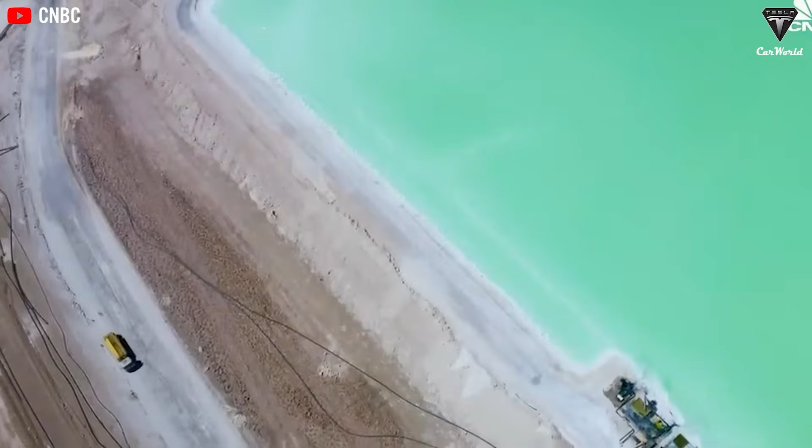Lithium-ion is everywhere around us. In phones, laptops, and more than 95% of today's EVs still rely entirely on this technology. That number alone is enough to show that lithium-ion remains the gold standard in the battery world, with few competitors capable of replacing it. But the truth is, lithium-ion batteries have been standing still for the past few years.

How long has it been since we saw a real leap in performance? Energy density is still stuck at around 250 watt-hours per kilogram. Prices haven't dropped significantly, and the risk of fire or explosion remains a constant concern. This is also why electric vehicles still haven't convinced all consumers. They remain expensive, and safety concerns continue to linger.

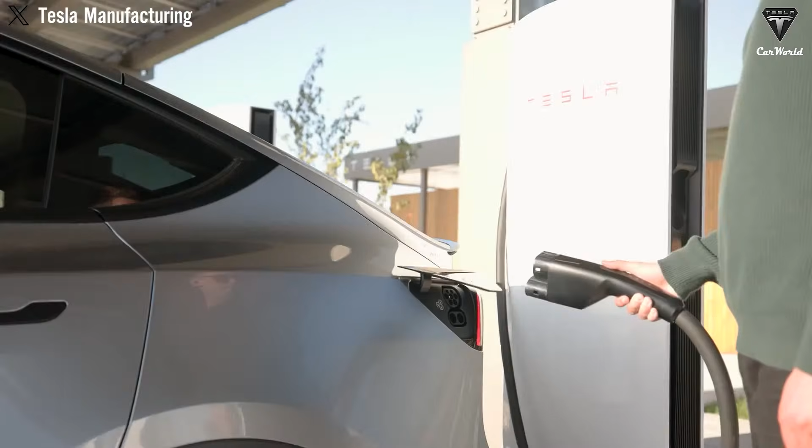Recently, EV manufacturers have begun shifting to a newer option, one considered far more efficient than lithium-ion's aging limitations: solid-state batteries. Solid-state batteries aren't just hype. Backed by rapid R&D and billions in investment from giants like BYD, Tesla, Toyota, and QuantumScape, this next-gen tech is already outperforming lithium-ion in energy density, range, and charging speed.

Mass production could start as soon as 2026. Could this be the final catalyst for EVs to leave gasoline behind for good? And what sets an EV with solid-state batteries apart?

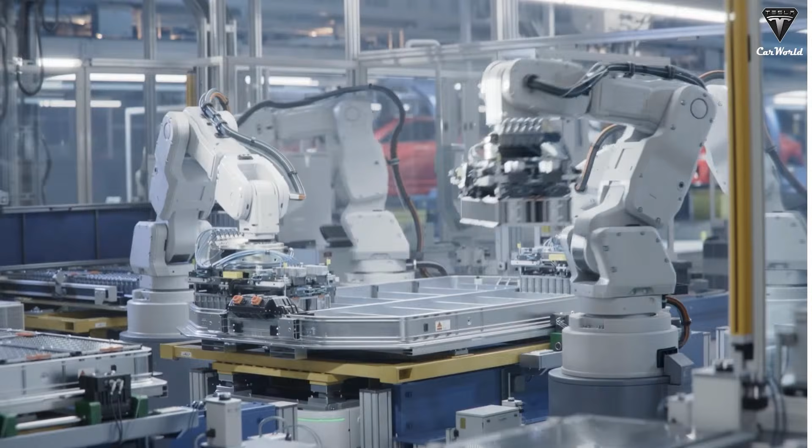So, what makes solid-state batteries worth paying attention to? We all know that most new battery technologies still haven't earned the public's full trust, and for good reason. Many are still stuck in the research or testing phase, and bold claims about breakthrough performance often come without real-world proof. But in the middle of all that noise, BYD, one of the world's leading EV and battery tech companies, and a top rival to Elon Musk's Tesla, is making some serious waves.

As you may know, BYD is already behind the Blade battery, a lithium iron phosphate battery known for its safety and durability. So reliable, in fact, that Tesla uses it in its Model Y sold in Europe. But now BYD is going even further by developing the very battery the world has been chasing: solid state.

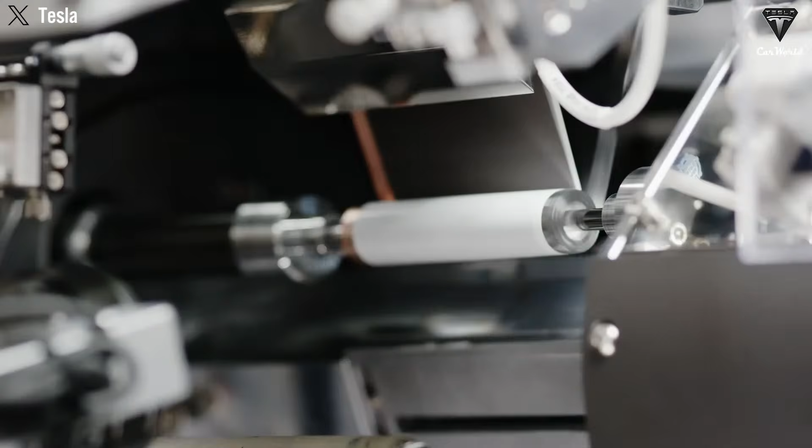They've already built a working prototype on a pilot production line and are expected to begin large-scale installation in their vehicles soon. This new battery boasts double the energy density of current cells, enabling up to 900 miles of range on a single charge. And that charge takes just over 4 minutes. If BYD sticks to its roadmap and delivers as promised, this battery could completely reshape the global EV market within this decade.

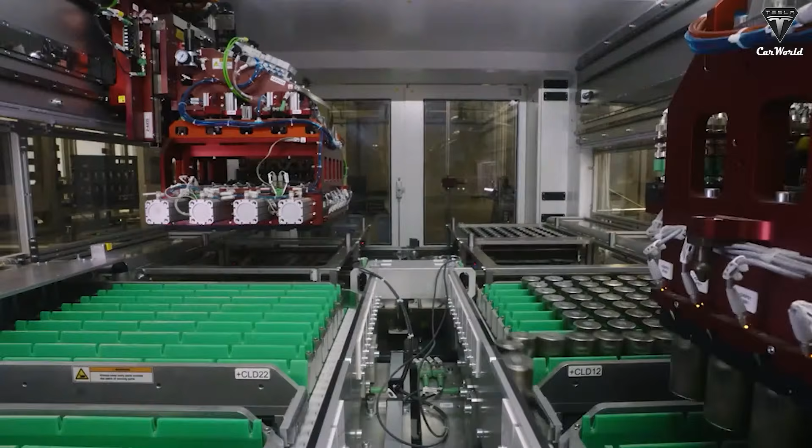Solid-state batteries mark a major leap forward in energy storage technology by completely eliminating flammable organic solvents and replacing them with solid materials like ceramics, sulfides, or polymers. This shift allows energy density to reach 400 to 500 watt-hours per kilogram, 2 to 3 times higher than that of traditional lithium-ion batteries. Imagine a suitcase the same size, but now able to hold twice as many clothes.

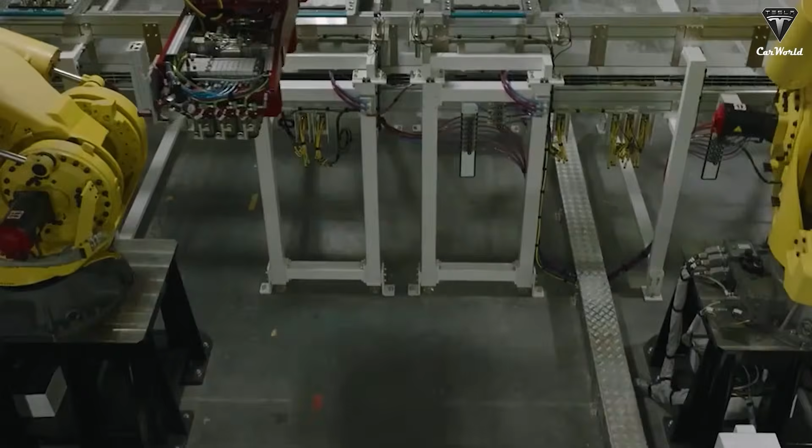Thermal resistance also sees a huge boost. Solid-state batteries remain stable across a wide temperature range, from -4 degrees Fahrenheit to 212 degrees Fahrenheit, equivalent to -20 degrees Celsius to 100 degrees Celsius, drastically reducing the risk of failure due to extreme heat or cold.

Durability? Even more impressive. With no more electrode wear or swelling issues, solid-state batteries can handle 2,000 to 3,000 charge cycles, while still retaining over 80% of their performance. That's like doubling the driving distance of a car before it ever needs a major overhaul. It might sound almost too good to be true, but these very advantages are exactly why battery giants around the world are racing towards solid-state technology.

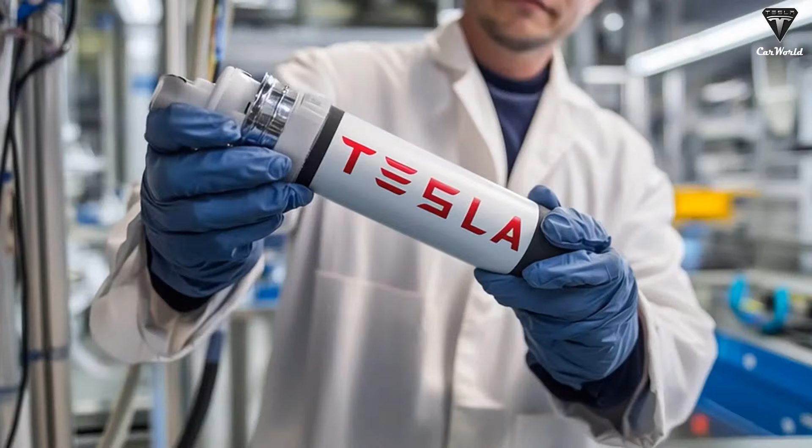In addition, many leading corporations are actively developing and commercializing solid-state battery technology. QuantumScape recently reported a breakthrough in its Cobra project, the successful fabrication of a micrometer-thin ceramic separator, a crucial step, as thinner separators lower interfacial resistance and enable higher current density. This new production method is said to be 25 times more efficient than the previous Raptor generation.

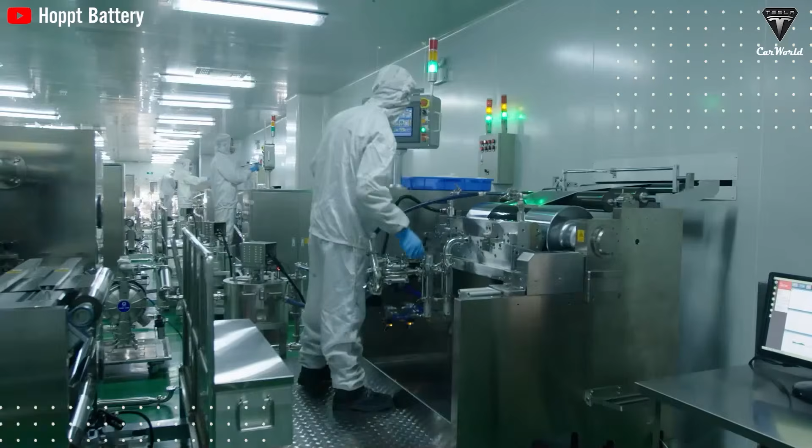The company has also partnered with Volkswagen's PowerCo, targeting a commercialization window between 2026 and 2028, in sync with the rollout of next-gen EV platforms. Solid Power, meanwhile, is focused on sulfide electrolytes, reporting room temperature ionic conductivity of approximately 1 millisiemens per centimeter. While not the theoretical maximum for sulfide systems, it's strong validation of their cell architecture, proven through 1,000 cycle tests on the BMW iX, a notable real-world milestone.

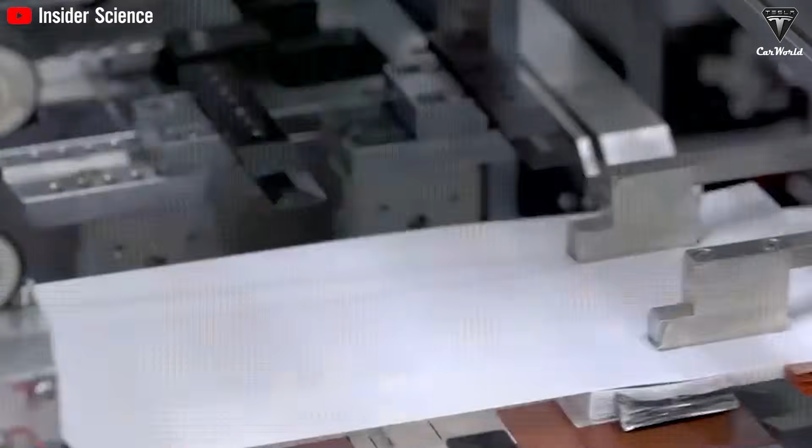On the oxide front, Toyota is developing LLZO, lithium lanthanum zirconium oxide, a solid electrolyte with a high melting point and stable performance from -4 degrees Fahrenheit to 212 degrees Fahrenheit. Their plan to integrate it into Lexus EVs by 2027 shows strong confidence in both its thermal and mechanical durability.

As for manufacturing capacity, Farasis Energy has launched a 0.2 gigawatt-hour pilot sulfide battery line in Germany, aiming to scale up to 1 gigawatt-hour per year by 2026 for both EVs and grid storage.

Finally, Huawei has unveiled a hybrid sulfide polymer battery boasting 450 watt-hour per kilogram energy density, over 2,000 kilometers of range, and an 80% charge in just 10 minutes. Impressive figures that, while promising, will need to be validated through rigorous life cycle testing and the demanding conditions of

the automotive industry. The truth is, every time a new battery type makes headlines, most people probably just roll their eyes and think, "Oh great, another gimmick." There's a common belief that these new batteries will never make it to mass production, let alone become mainstream in electric vehicles. And, honestly, we used to think the same. That reaction is completely understandable.

Lithium-ion has earned its place as the gold standard for EVs thanks to its stable energy density and a dramatic drop in cost, from around $1,000 per kilowatt-hour in 2010 to roughly $130 per kilowatt-hour by 2024. However, take a closer look, and it's not just us.

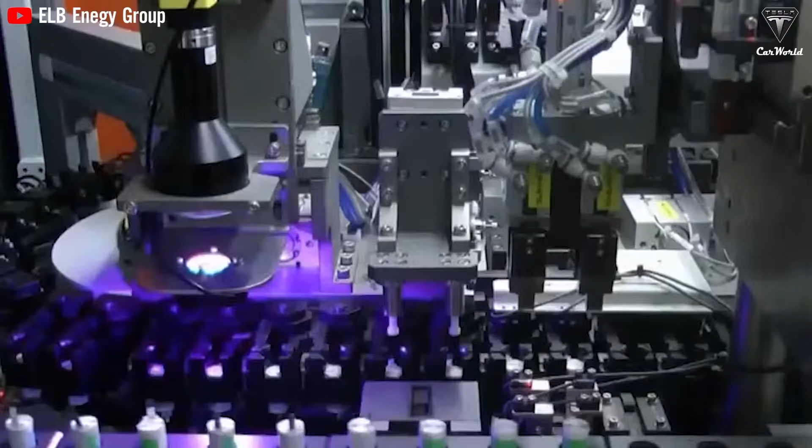Many experts agree. Lithium-ion is one of the biggest reasons EV performance has hit a ceiling. Despite being widely adopted for decades, this technology has slowed innovation and eroded public confidence in electric vehicles. By key metrics, traditional lithium-ion batteries typically offer around 180 to 250 watt-hour per kilogram. In contrast, next-gen solid-state designs are targeting 400 to 500 watt-hour per kilogram.

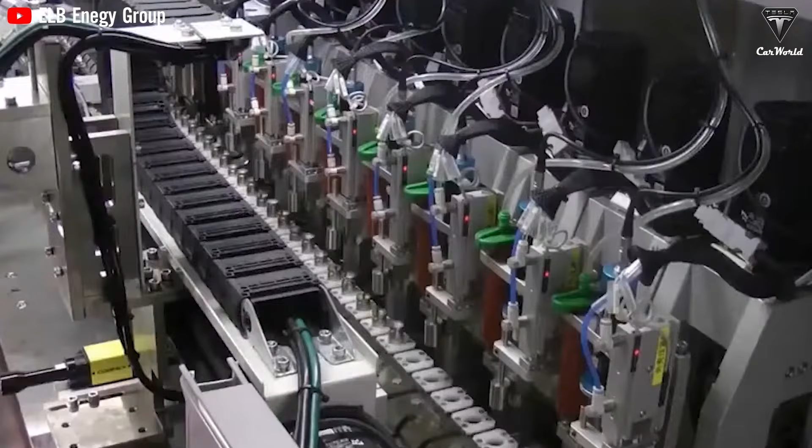That kind of jump can translate to either lighter battery packs or significantly longer driving ranges, without increasing size or weight. Lifespan also tends to favor solid-state batteries. Instead of the typical 1,000 to 1,500 full charge-discharge cycles seen in lithium-ion batteries, solid-state batteries can deliver around 2,000 to 3,000 cycles, meaning their capacity fades more slowly over time. Charging speed is another key differentiator.

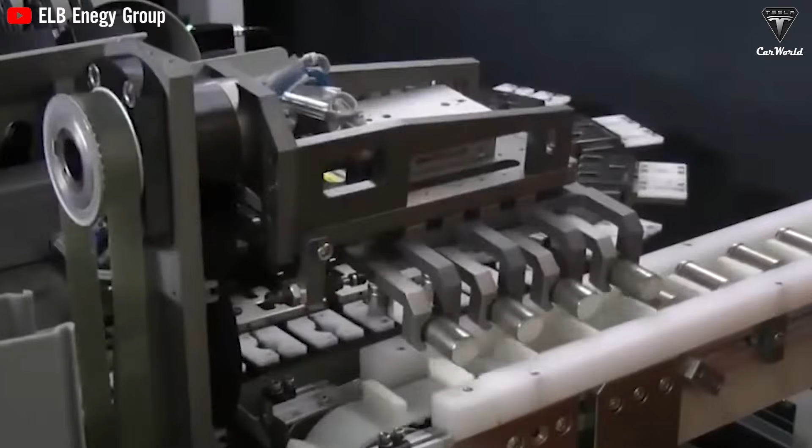Most lithium-ion battery systems go from 0 to 80% in about 25 to 35 minutes, while solid-state tech is targeting just 10 to 15 minutes, significantly cutting downtime. They also operate within a much broader temperature range, from -10 degrees Celsius to 50 degrees Celsius for lithium-ion, compared to -20 degrees Celsius to 100 degrees Celsius for solid-state, which could simplify thermal management systems.

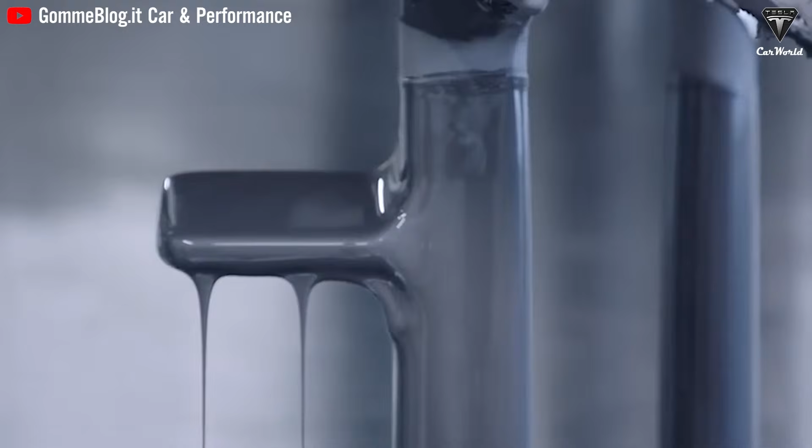Safety rounds out the list of advantages. By replacing flammable liquid electrolytes with solid materials, the risk of thermal runaway drops from moderate to high to virtually zero. That said, current lithium-ion chemistry still holds key strengths. It's proven, mass-produced, and highly cost-optimized.

Top-tier lithium-ion cells are already pushing the upper limits of their energy density range, though results vary based on cell format and pack design. Some of the most impressive solid-state metrics come from controlled prototypes, and transitioning those into mass production while maintaining fast charge durability and addressing interfacial resistance remains an active engineering challenge. For now, lithium-ion remains the practical choice for mainstream applications, especially where cost and supply chain maturity are critical.

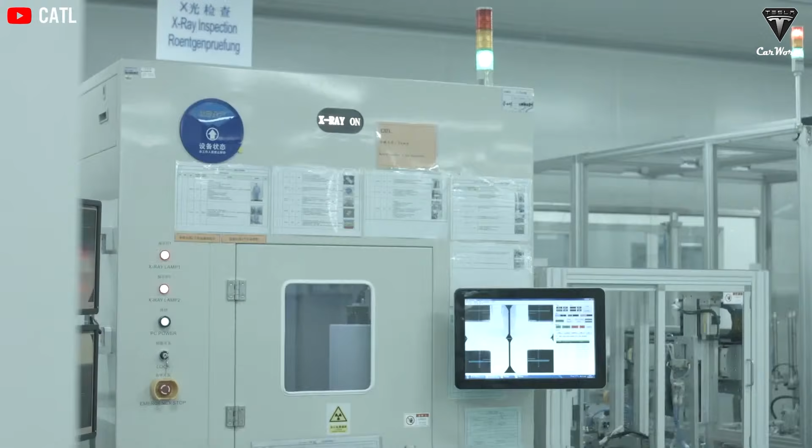Still, the direction is clear. If manufacturers can industrialize solid-state batteries without compromising these numbers, they offer a compelling foundation for the next generation of electrified systems, with higher energy, faster charging, greater thermal resilience, and improved safety. When will semi-solid batteries hit the road in EVs?

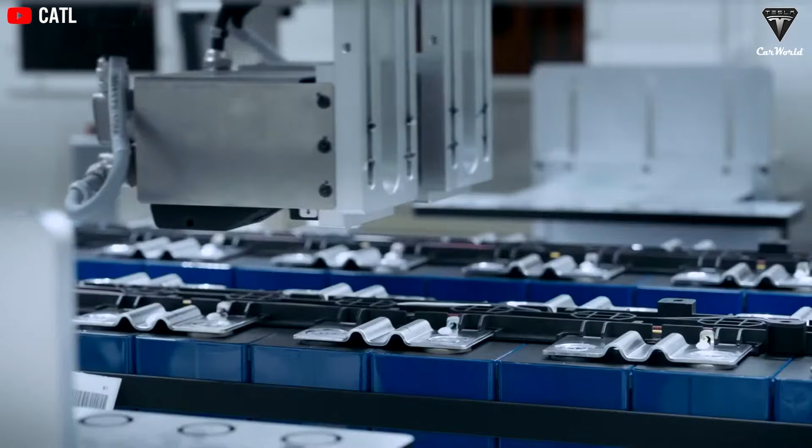Lithium-ion batteries have long struggled with key challenges, including the risk of fire or explosion due to thermal runaway when damaged or overheated. On top of that, technological progress has been relatively slow, with energy density improving by just 5 to 10% per decade. Environmental concerns are also mounting, especially around the mining of raw materials like nickel and cobalt.

Solid-state batteries offer major advantages: up to 2 to 3 times the energy density of today's LFP cells, along with impressive durability and superior safety. They're almost non-flammable. This is exactly why the EV industry often refers to them as the holy grail of electric vehicle batteries. Put simply, every battery cell is made up of 4 key components: a cathode, anode, electrolyte, and separator.

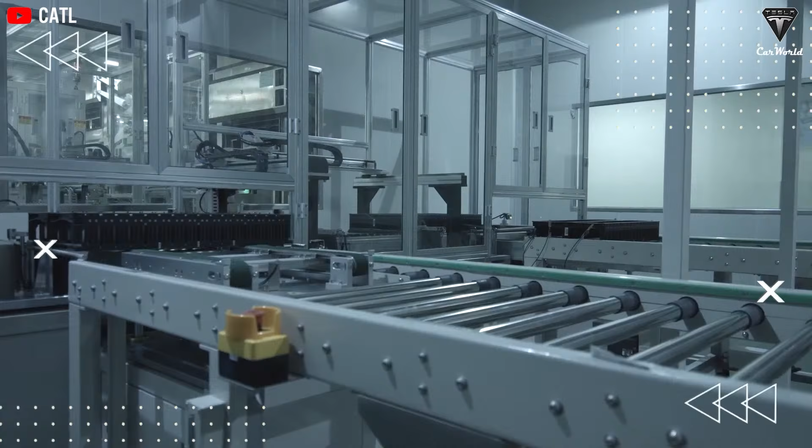As the name suggests, solid-state batteries replace these components, most importantly the electrolyte, with solid materials. What truly sets them apart is the solid electrolyte layer positioned between the anode and cathode, whereas traditional lithium-ion batteries use a liquid electrolyte in that same space. This is where solid-state batteries shine. They can store more energy, deliver higher power output, and are significantly safer than their lithium-ion counterparts.

Liquid electrolytes in conventional batteries are flammable, prone to leakage if the cell is cracked, and can trigger thermal runaway, a dangerous chain reaction that spreads from one cell to another. In contrast, most solid-state batteries today use ceramics or polymers as solid electrolytes.

The application roadmap for solid-state batteries kicks off around 2025 and 2026, focusing on validating the technology under real-world conditions. Prototype cells are already being tested in trial vehicles by BMW, Volkswagen, and Toyota, while pilot production lines are up and running in the US (Solid Power), Germany (Farasis), and China (Huawei).

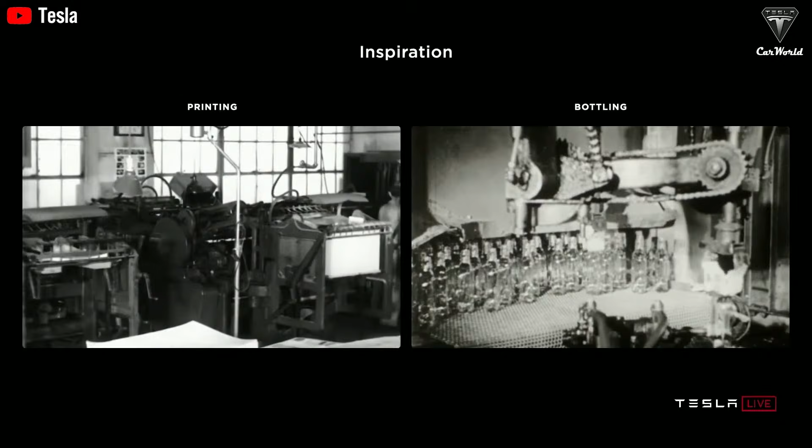The current priority is stabilizing manufacturing processes, controlling key variables like separator thickness and moisture levels, especially for sulfide-based systems, standardizing cell formats, and conducting safety evaluations at the module and pack levels, all essential steps toward meeting regulatory certification standards.

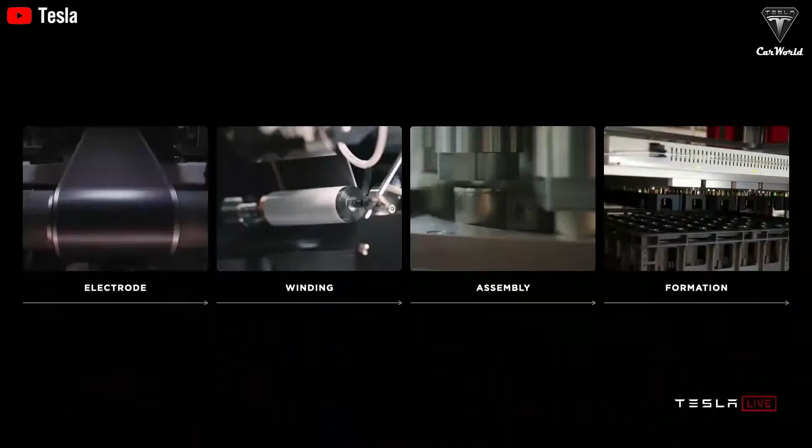From 2026 to 2028, solid-state batteries are expected to enter a limited-scale semi-commercial phase, with a focus on premium segments and industrial storage, markets that can absorb higher costs in exchange for better energy density and safety. As cumulative production approaches 1 gigawatt-hour, prices are expected to begin stabilizing. Manufacturers will concentrate on increasing production yield, reducing defects, optimizing thermal propagation control, and fine-tuning battery management systems for lithium metal anodes using real-world performance data.

Between 2028 and 2030, the goal is to scale up to mainstream vehicle segments, particularly compact sedans and crossovers, comparable to the Tesla Model 3 category, as solid-state battery costs approach parity with lithium-ion battery cells. At this stage, they must meet demanding requirements: long-cycle life warranties, minimal degradation under repeated fast charging, and full compatibility with 800-volt vehicle architectures.

After 2030, the technology is expected to see widespread adoption across entire EV lineups and grid storage systems. This phase will go hand-in-hand with supply chain standardization, multi-source material strategies, the development of recycling protocols, and end-to-end cost optimization, all critical to ensuring large-scale reliability and sustainability.

Back to BYD. The company has confirmed that its solid-state batteries deliver an energy density of 400 watt-hours per kilogram, nearly double that of conventional lithium-ion cells, which average around 210 watt-hours per kilogram, and significantly higher than BYD's current Blade battery, which offers about 160 to 165 watt-hours per kilogram.

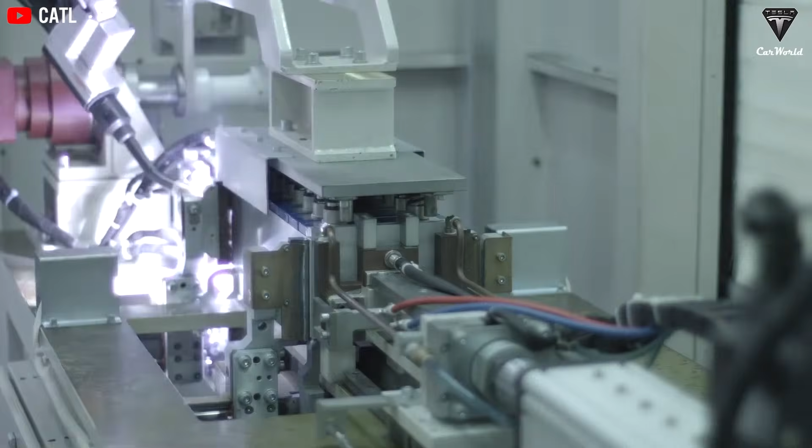Imagine this. If you bought a current BYD Seal equipped with an 80 kilowatt-hour Blade battery, you'd get around 373 miles of range. Now, with the new solid-state battery of the same size, that range could jump to an astonishing 870 miles. But here's the thing. You might not even need that much capacity. A smaller 60 kilowatt-hour pack could still deliver up to 621 miles of range. That's insane. The higher energy density of solid-state batteries means you can store more power without adding weight, a critical advantage for electric vehicles.

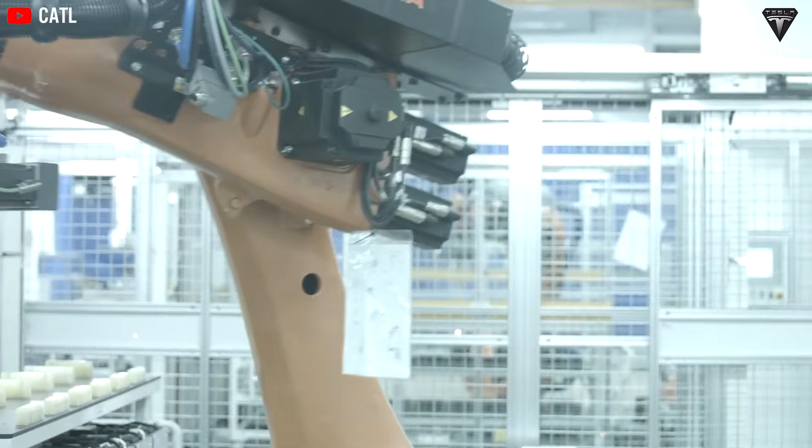Of course, 400 watt-hours per kilogram isn't record-breaking compared to some other solid-state contenders. Companies like CATL, Amprius Technologies, and QuantumScape have already developed batteries exceeding 500 watt-hours per kilogram. But BYD is taking a more measured approach with its first-generation solid-state cells. Rather than chasing extreme specs too soon, they're aiming for a more attainable target, one that enables faster mass production and real-world rollout. From there, they can scale and improve.

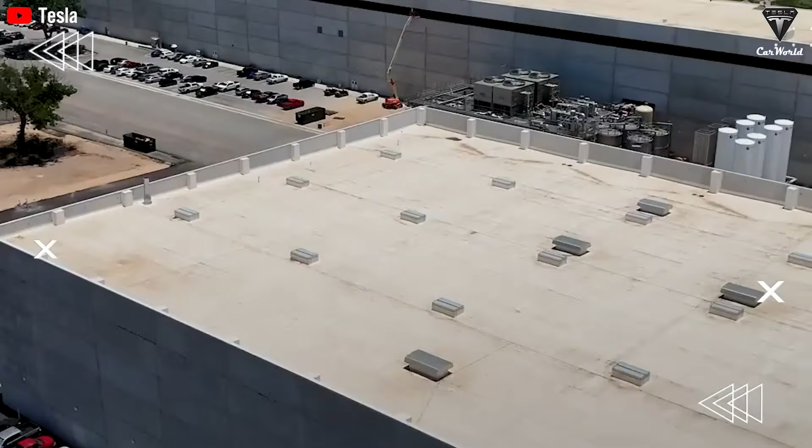Why aren't solid-state batteries used in EVs right now? One of the most critical barriers is the scalable production of ultra-thin ceramic separators. These separators, placed between the battery's anode and cathode, are crucial for the flow of ions. Unlike the flexible polymer separators used in lithium-ion batteries, ceramic separators are rigid and fragile, making them prone to cracking during large-scale manufacturing. Producing them at commercial volumes with micron-level precision and mechanical durability has proven difficult.

Many pilot production lines still suffer from high defect rates and unstable yields. Without a breakthrough in processing techniques and quality control, this component alone threatens to slow the rollout of solid-state cells.

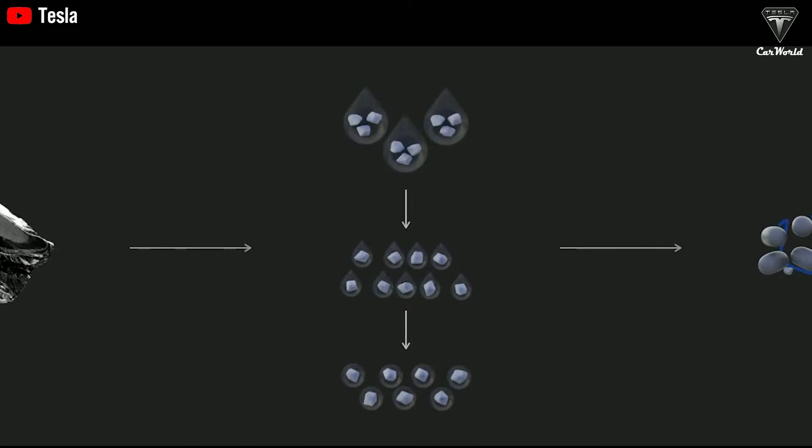Another major obstacle is performance at low temperatures. Certain sulfide-based electrolytes, widely considered among the most promising candidates for solid-state designs, tend to lose significant ionic conductivity below 0 degrees Celsius. This degradation severely limits their functionality in colder climates, such as Europe, Canada, and the northern United States. For solid-state batteries to succeed globally, they must perform reliably in winter conditions. Achieving this will require new formulations or hybrid solutions that maintain conductivity without compromising stability or cost. Without progress here, many high-value markets will remain out of reach.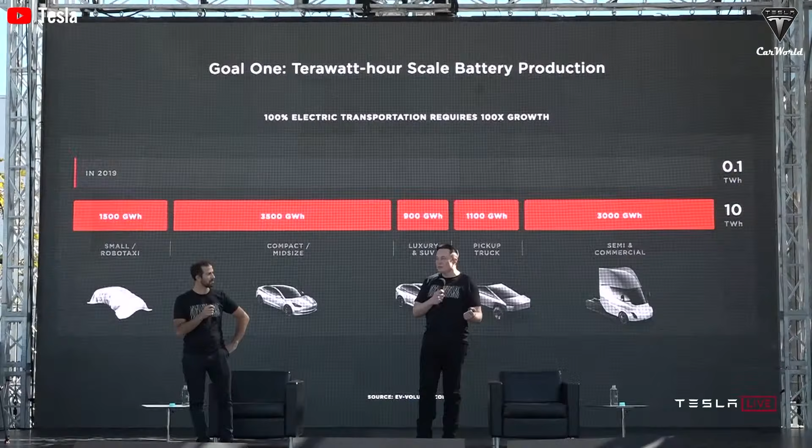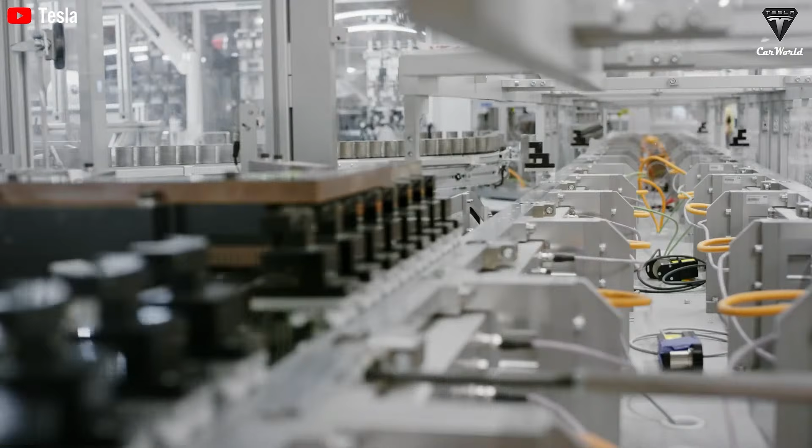So how does this new supercapacitor work? Unlike conventional lithium-ion batteries, which rely on chemical reactions to store and release energy, supercapacitors, or ultracapacitors, operate on purely electrostatic principles. Essentially, a supercapacitor consists of two conductive plates, typically made of high surface area carbon materials, separated by an electrolyte. When a voltage is applied, ions in the electrolyte immediately accumulate on the surfaces of the electrodes.

Positive ions on the negatively charged plate and negative ions on the positively charged plate. The energy is stored in the electric field formed between these two charged layers, allowing both charging and discharging to occur in mere seconds or less. Since no chemical transformations take place, supercapacitors exhibit exceptional cycle life, often well beyond 100,000 cycles, and can deliver extremely high power densities, able to supply large currents almost instantaneously.

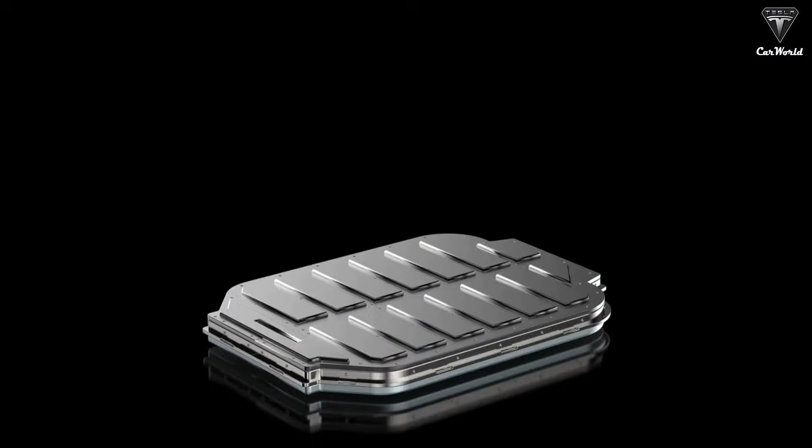However, a persistent drawback has been their relatively low energy density. Traditional carbon-based double-layer supercapacitors typically achieve energy densities on the order of 5 to 10 watt-hours per kilogram, compared to 150 to 250 watt-hours per kilogram for modern lithium-ion batteries.

This means that although supercapacitors can charge and discharge extremely quickly, often reaching full charge in seconds and delivering power densities exceeding 10,000 watts per kilogram, they cannot sustain a high power output over extended periods, making them impractical for most EV driving ranges or smartphone runtimes without substantial improvements in stored energy.

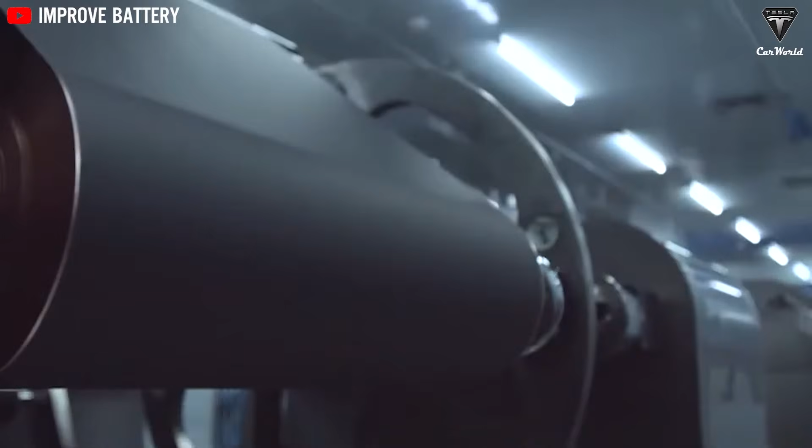Recent breakthroughs from the Korea Institute of Science and Technology, KIST, have dramatically narrowed this gap. In May 2025, a KIST research team unveiled a novel next-generation supercapacitor that leverages a composite fiber architecture combining polyaniline, PANI, with carbon nanotubes, CNTs.

In this design, CNTs provide exceedingly high electrical conductivity and a large three-dimensional network for ion transport, while PANI, an intrinsically conducting polymer, offers pseudo-capacitive behavior that supplements the electric double-layer mechanism. Together, these materials produce a composite fiber that synergistically enhances capacitance, energy density, and power output without sacrificing durability.

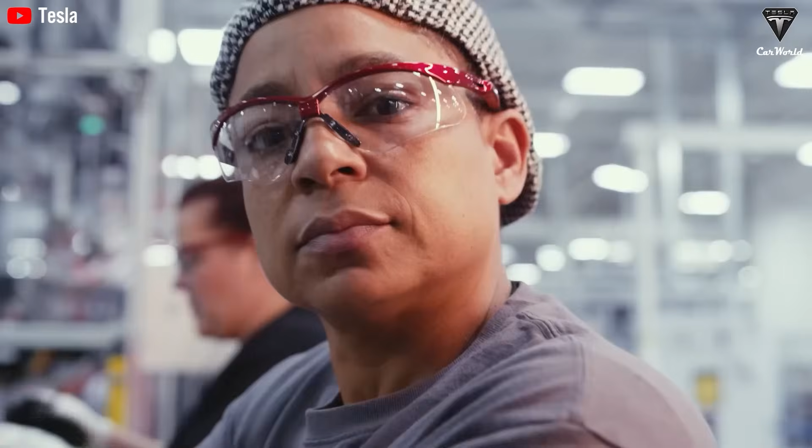Laboratory measurements demonstrate that this composite achieves a specific capacitance of 1,714 farads per gram, a staggering improvement over typical activated carbon supercapacitors, which usually deliver 100 to 200 farads per gram. More impressively, the energy density reaches 418 watt-hours per kilogram, nearly double that of many lithium-ion batteries and an order of magnitude greater than legacy carbon-based ultracapacitors.

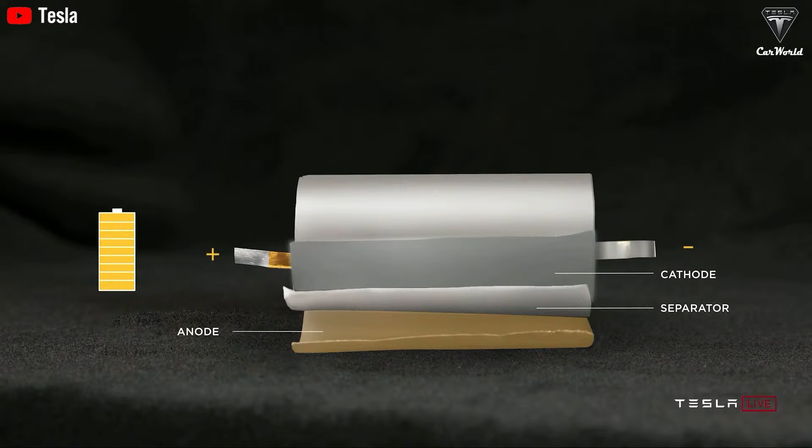Equally noteworthy, the power density is measured at 1,150 watts per kilogram, enabling ultra-rapid charge-discharge cycles on the order of seconds. After 100,000 charge-discharge cycles, the device retains nearly 100% of its original capacity, confirming remarkable stability. You might be wondering, what do these performance numbers really mean compared to today's lithium-ion batteries?

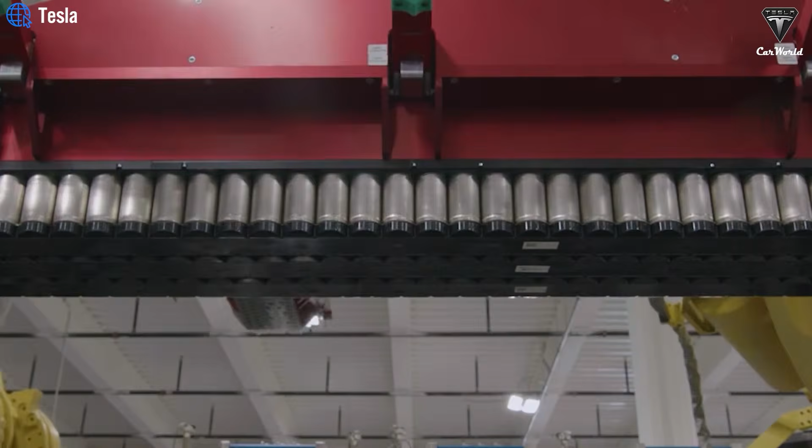Energy density. This new supercapacitor developed by KIST delivers an energy density of 418 watt-hours per kilogram. That's not just impressive. It actually surpasses the theoretical maximum for most commercial lithium-ion batteries. For comparison, even cutting-edge lithium cells like Tesla's 4680 top out around 250 watt-hours per kilogram. In simple terms, this means the KIST supercapacitor can store about 60% more energy per kilogram than today's best lithium batteries, a major leap in energy storage efficiency.

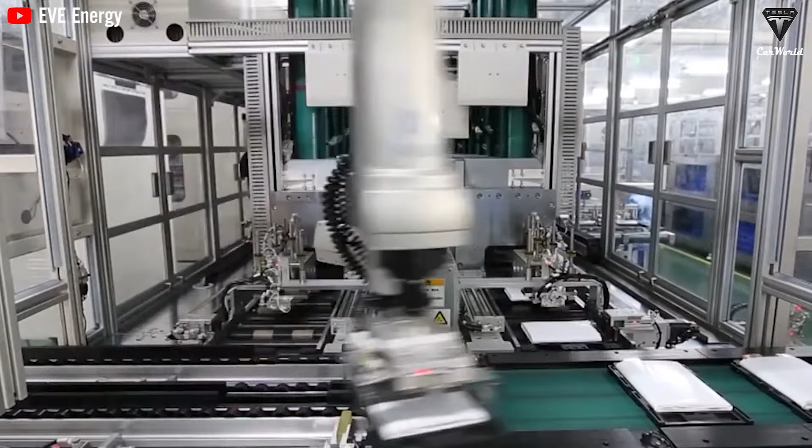Now, let's talk about durability. This supercapacitor retains 100% of its capacity after 100,000 charge-discharge cycles. That's exceptional. By comparison, lithium-ion batteries typically lose 20 to 30% of their capacity after just 1,000 to 2,000 cycles. In practical terms, this means you could charge and discharge it every single day for decades without noticeable degradation. A huge advantage for applications that require frequent, fast charging, like urban EVs, drones, or industrial equipment.

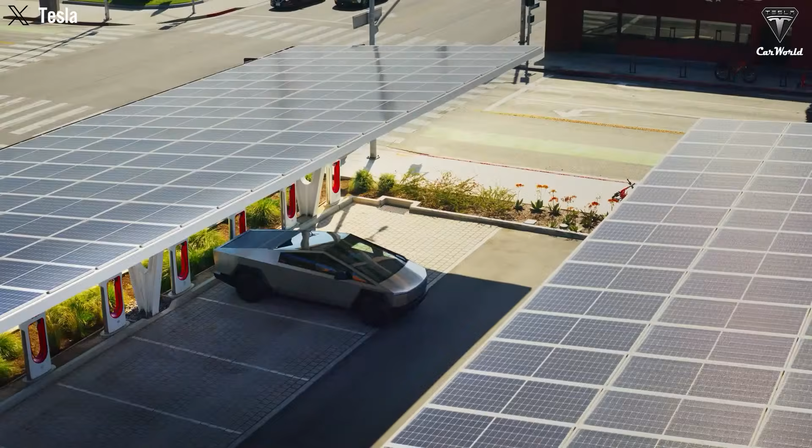Comparatively, most commercial ultracapacitors, e.g. Maxwell Technologies BoostCap modules, deliver roughly 10 watt-hours per kilogram and 10 kilowatts per kilogram, with cycle lives around 500,000 cycles.

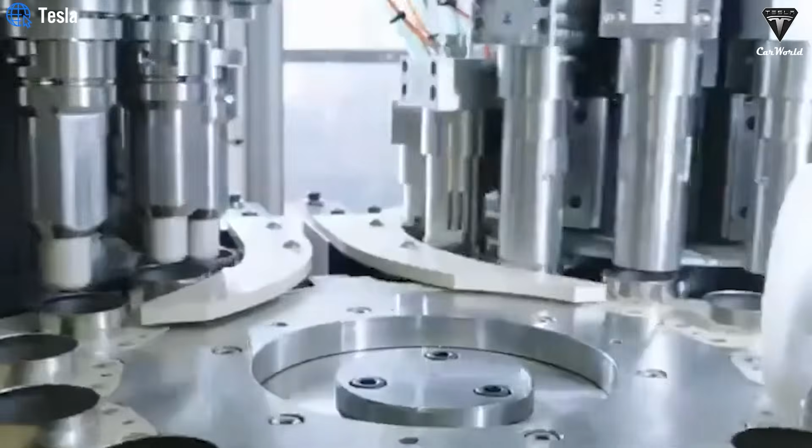The KIST prototypes leap to 418 watt-hours per kilogram and approximately 100 kilowatts per kilogram power. Normalized, this shrinks the performance gap with batteries to the point where hybrid battery-supercapacitor systems become viable even for long-range EVs. For instance, an EV equipped with a 20 kilowatt-hour supercapacitor pack could, in principle, recharge in under 3 minutes at a charging power of 400 kilowatts, matching or exceeding the fastest battery-based fast chargers.

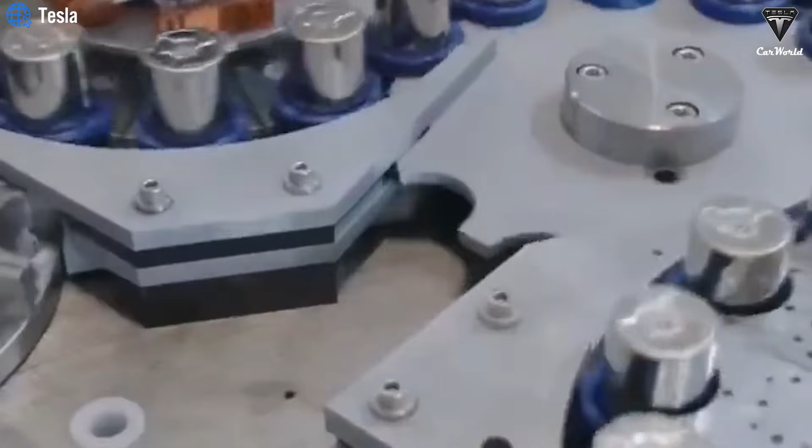What is the actual cost of this supercapacitor? Although no commercial pricing has yet been announced for KIST's breakthrough PANI-CNT supercapacitor, we can infer its likely cost structure by examining existing data on conventional supercapacitors and lithium-ion batteries, as well as preliminary estimates provided by the researchers. Traditional activated carbon supercapacitors typically cost more than $1,000 per kilowatt-hour, in large part because their low energy density, 5 to 10 watt-hours per kilogram, means that vast volumes of material are required for even modest energy storage.

By contrast, the average cost for lithium-ion battery cells fell to approximately $115 per kilowatt-hour in late 2024, and is forecast to dip below $100 per kilowatt-hour during 2025 as economies of scale expand and production processes improve. For context, lithium iron phosphate cells averaged $60 per kilowatt-hour in 2024, while high-nickel NCM cells hovered closer to $70 to $90 per kilowatt-hour. Given those baselines, KIST's PANI-CNT composite, boasting an energy density of 418 watt-hours per kilogram, nearly double that of top-end lithium-ion cells, presents an entirely new value proposition.

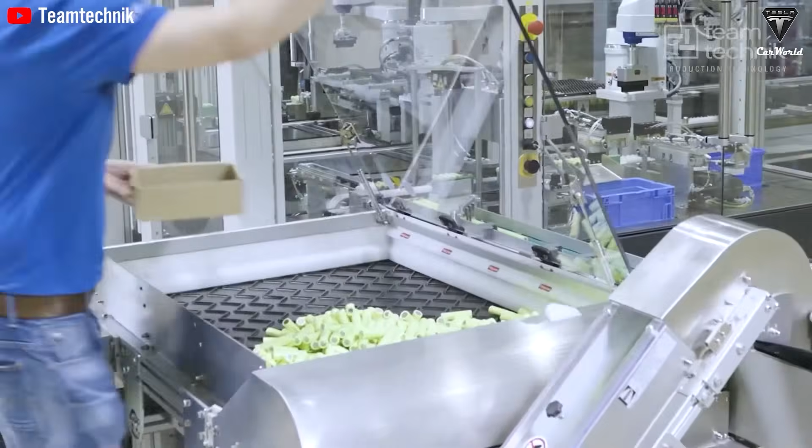In a recent press release, KIST researchers projected that once scaled, the composite fibers might be produced at roughly $50 per kilowatt-hour, on a par with or even below leading lithium-ion pack prices. This estimate is derived from the relatively low intrinsic cost of PANI, a mass-produced conductive polymer, combined with advances in CNT synthesis that leverage chemical vapor deposition at high throughput. Although single-walled carbon nanotubes historically commanded prices of $100 to $200 per kilogram, recent process refinements and increased production capacity in China have driven raw CNT costs below $50 per kilogram for bulk industrial quantities.

By contrast, premium battery-grade cathode materials like NMC can cost $20 to $30 per kilogram, but must be combined with copper, aluminum, separators, and complex electrode formulations, pushing battery pack costs to $100 to $150 per kilowatt-hour even after decades of scale. However, it remains crucial to differentiate between cell-level cost estimates, for example, raw materials plus manufacturing, and pack-level or module costs that include packaging, thermal management, control electronics, and certification. KIST's $50 per kilowatt-hour projection likely refers to the cell or fiber level, an apples-to-apples comparison with the $30 to $60 per kilogram PANI and $50 per kilogram CNT raw materials.

To achieve this, KIST's researchers employ a roll-to-roll fiber spinning process where CNTs and PANI are covalently bonded in a continuous fashion, minimizing steps and solvent usage. Such a streamlined technique contrasts sharply with the complex slurry casting methods for lithium-ion electrodes: multiple coating, drying, calendering, and lamination stages that collectively inflate costs. Consequently, even if its composite fibers cost $60 to $80 per kilogram at pilot scale, their extraordinary specific capacitance, 1,714 farads per gram, means that relatively fewer grams of material yield the same energy, translating into a cell-level cost of $100 to $150 per kilowatt-hour in early production, and potentially slashing to $50 to $80 per kilowatt-hour as volume grows.

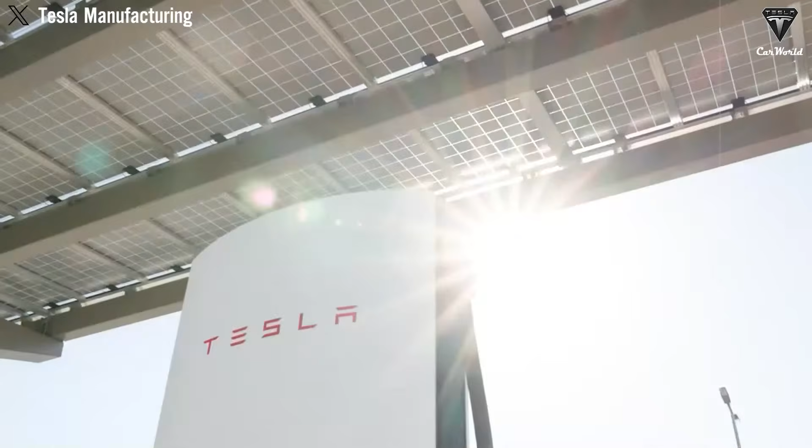For a direct comparison, consider that a typical industrial supercapacitor module providing 1 kilowatt-hour of usable energy in 2021 cost $2,000 to $3,000, which equates to $2,000 to $3,500 per kilowatt-hour when factoring in overhead and packaging. Even though they deliver extremely high power densities, 10 kilowatts per kilogram, their low gravimetric energy, 5 to 10 watt-hours per kilogram, drives up per kilowatt-hour costs. By contrast, KIST's composite, increasing gravimetric energy density to 418 watt-hours per kilogram, shrinks the required mass of active material by a factor of 40 to 80, immediately undercutting legacy supercapacitor pricing by an order of magnitude.

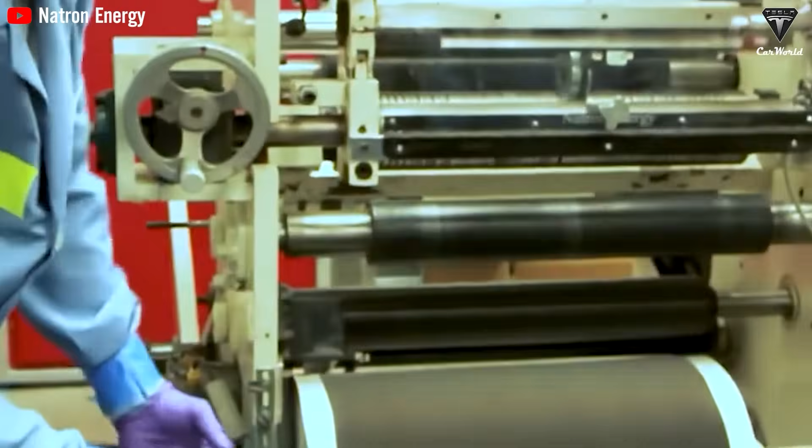In practical terms, a 10 kilowatt-hour supercapacitor pack, suitable for a mid-range electric vehicle, could, in theory, be manufactured for $500 to $800, compared to $20,000 to $35,000 for current ultracapacitor systems, and $1,000 to $1,200 for a comparable lithium-ion battery pack. Even adding packaging, thermal control, and electronics might only raise this system's cost to $1,000, still undercutting established battery and supercapacitor technologies.

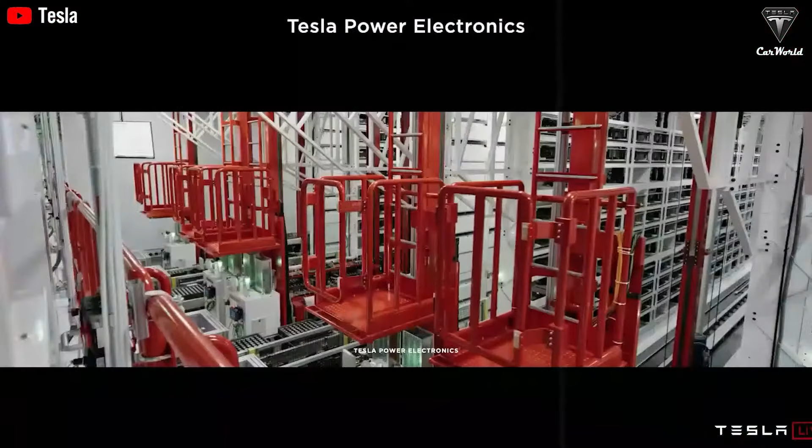Although KIST's technology shows a lot of promise, there are still several important considerations before it can be widely adopted. Currently, KIST produces only grams or kilograms of composite fiber using chemical vapor deposition and oxidative polymerization. At metric ton scale, maintaining over 95% yield is essential. Otherwise, scrap rates skyrocket, driving raw composite costs, and thus cell-level costs, above $100 per kilowatt-hour during early scale-up. Single-walled CNTs are particularly problematic.

Purification and sorting can reject 20 to 30% of synthesized nanotubes, potentially raising CNT costs to $200 to $300 per kilogram if processes aren't optimized. Similarly, any batch-to-batch PANI inhomogeneity can degrade capacitance and cycle life.

Second, volumetric energy density presents a volume penalty. Although 418 watt-hours per kilogram is exceptional gravimetrically, the composite's 820 milliwatt-hours per cubic centimeter is comparable to premium lithium-ion pouch cells, approximately 700 milliwatt-hours per cubic centimeter.

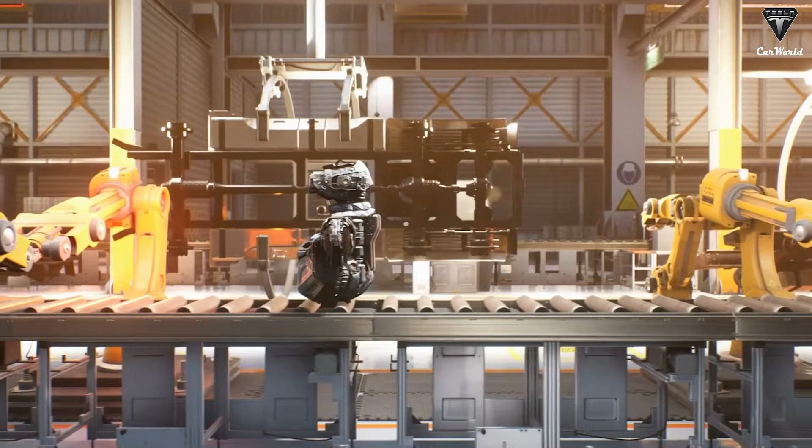What are the benefits of this new type of battery? Traditional lithium-ion batteries take several minutes, even with high-power chargers, to reach 80% charge. In contrast, CNT supercapacitors use electrostatic storage, enabling them to charge in seconds. In KIST lab tests, these composite fibers reached 90% of their full capacity in under 45 seconds at 2 amperes per cubic centimeter. For comparison, typical carbon-based ultracapacitors take at least 3 minutes.

Applied to EVs, a scaled 10 kilowatt-hour module could recover around 50 kilometers of range in under 1 minute on a 60 kilowatt charger, well beyond lithium-ion capabilities. In smartphones, this means charging from 0% to 80% in under 30 seconds, effectively eliminating battery anxiety.

Unlike lithium-ion cells, which lose 20 to 30% of capacity after 1,000 to 2,000 cycles, KIST's CNT supercapacitors retain over 98% after 150,000 cycles. Even in accelerated testing, cycled at 3 amperes per cubic centimeter for 6 months, capacity loss stayed below 1%.

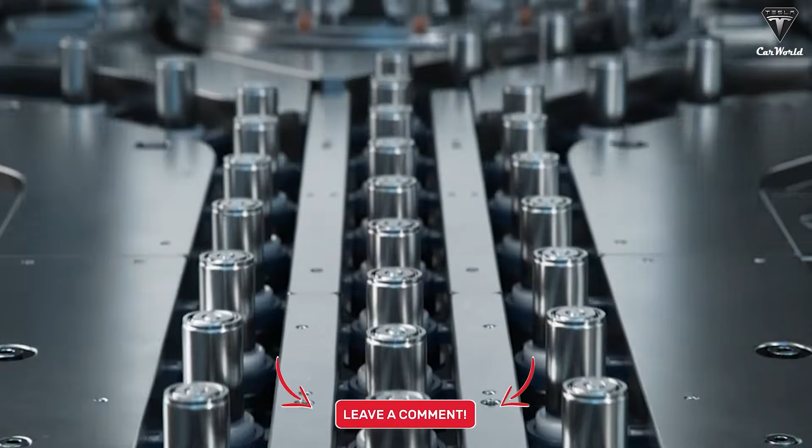So, with an energy density of 418 watt-hours per kilogram, nearly double that of today's best lithium-ion batteries, could KIST's supercapacitor fully replace traditional batteries in electric vehicles, or are there still limitations when it comes to sustained driving range?

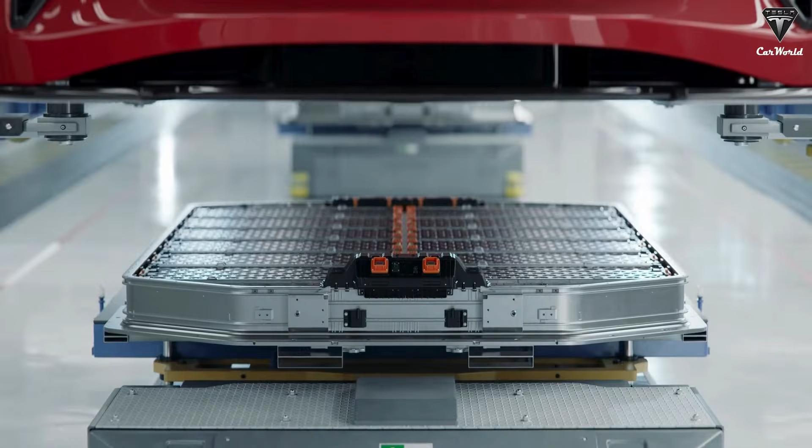The most critical component of an electric vehicle is the battery, but if it fails, you might have to replace the entire floor of the car. This isn't just a design weakness, it's a ticking time bomb for the future of EV. Now imagine a battery lighter than ever before. One thin enough to cut a laptop's weight in half, slim enough to make phones as thin as a credit card, and powerful enough to boost an EV's range by up to 70%.

And here's the kicker. It doesn't swell while charging, doesn't grow dendrites that cause short circuits, doesn't deform on impact, and doesn't degrade quickly over time. Why is that?

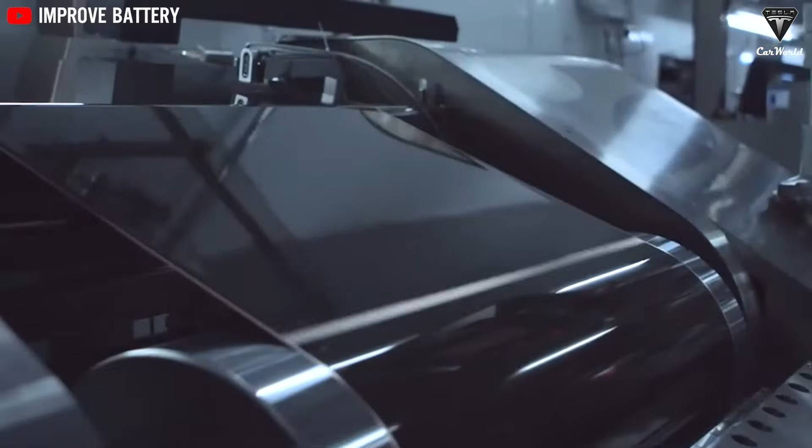The one at Korea Advanced Institute of Science and Technology, KAIST, which has developed a high-density structural battery made from a multifunctional carbon fiber composite. Their innovation lies not only in materials selection, carbon fiber for strength, and solid polymer electrolyte for ion conductivity, but also in the process of integrating those materials. Resin, a core component of the composite, typically traps air during curing, weakening both structural and electrochemical performance.

To address this, KAIST employed vacuum compression molding, which tightly controls temperature and pressure during fabrication. The result? A cleaner, purer composite with minimal trapped air that delivers both robust mechanical properties and battery-like functionality. Their achievement is notable: a 160% increase in carbon fiber volume fraction compared to previous efforts, yielding a structure that is lighter, stronger, and capable of storing energy.

This isn't a proof of concept on paper. It's a manufacturable design using well-understood industrial processes, meaning it could, in theory, be scaled. Meanwhile, across the globe at Chalmers University of Technology in Sweden, researchers led by Leif Asp have been making quiet, steady progress with a different structural battery composite.

Their design also uses carbon fiber composites, but with a twist. The carbon fibers serve dual purposes as both the structural support and the electrodes. A structural electrolyte completes the system, enabling ion flow through a material that's as stiff and lightweight as many metals. According to early projections from the Chalmers team, structural batteries could cut a laptop's weight in half, reduce a smartphone's thickness to that of a credit card, or boost an EV's range by up to 70%.

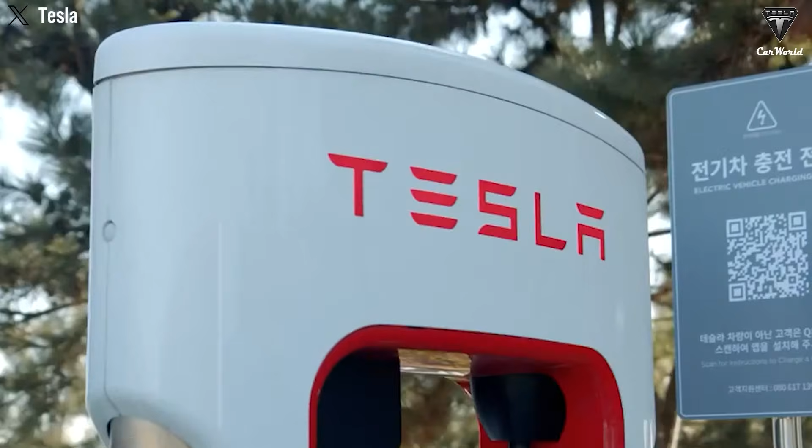These are bold predictions, perhaps even optimistic, but they illustrate the transformative potential. Think of it like baking a classic pie, a flaky crust on the outside, a sweet or savory filling on the inside. Now imagine trying to make that pie tastier, lighter, and more nutritious. You'd naturally wonder, why should the crust exist only to keep everything in place? Why can't it be both sturdy and as nourishing as the filling itself?

Yes. By replacing both the chassis and the separate lithium-ion pack with a carbon fiber laminate that stores energy while carrying load, an average mid-size electric vehicle could drive roughly 70% farther on a single charge. Computer models show that today's 450 kilograms of metal bodywork and 500 kilograms of standard cells can give way to a 30 watt-hours per kilogram structural pack weighing about 750 kilograms.

Yet the car still loses around 200 kilograms overall because the old chassis disappears altogether. Lower mass, coupled with the extra space freed inside the floor, translates directly into longer real-world range. The same material promises equally striking gains at smaller scales. Prototype laptop housings built from the laminate deliver the stiffness of aluminum, about 70 GPa, while storing enough energy to eliminate the separate battery modules.

Because the shell now doubles as the power source, Chalmers engineers calculate that a typical notebook's total mass could fall by roughly half without losing runtime. For smartphones, the team has demonstrated single-sheet cells only 0.8 millimeters thick that function as the device's mid-frame. TechRadar reported that this could enable handsets less than 4 millimeters deep, essentially the thickness of a credit card.

Between the first 2021 prototype and the latest 2024 version, gravimetric energy density rose from 24 watt-hours per kilogram to 30 watt-hours per kilogram, while mechanical stiffness nearly tripled. Safety has advanced as well. The new architecture uses a semi-solid electrolyte and cobalt-free chemistry, so it neither swells during fast charging nor forms the metallic dendrites that trigger shorts in conventional cells.

So why are EV makers betting on eliminating lithium in EVs? When most people think about electric vehicles, they focus on things like range, charging time, and battery capacity. But what if the next big breakthrough in EVs wasn't about putting in a better battery, but rather about turning the entire car into a battery itself?

That's the strange and exciting idea behind structural batteries, an innovation that could transform how we design vehicles from the ground up. Instead of simply improving the chemistry of batteries, structural batteries flip the concept entirely. These are materials that serve both as structural components, like the body or frame of a car, and as energy storage. In other words, rather than having a battery inside, the car is the battery.

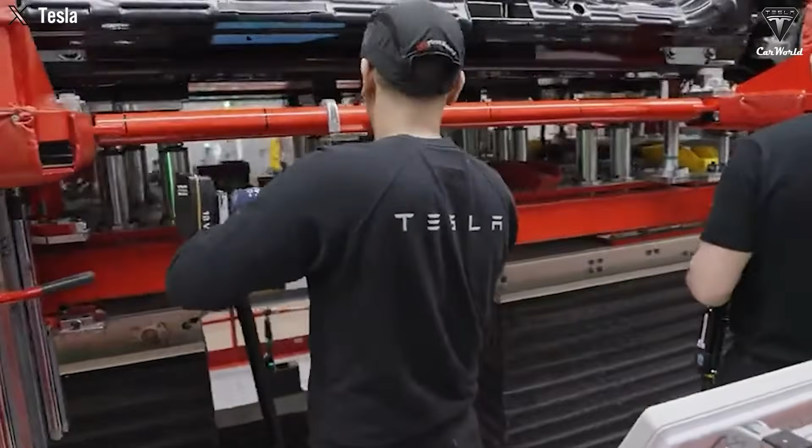This may sound futuristic, but companies like Tesla and BYD are already moving in that direction. Tesla has begun integrating battery packs as structural parts of its Model Y and Cybertruck, reducing the number of separate components and improving vehicle stiffness and efficiency. Meanwhile, research institutions and manufacturers around the world are racing to develop structural battery materials that are strong, lightweight, and capable of storing real amounts of energy.

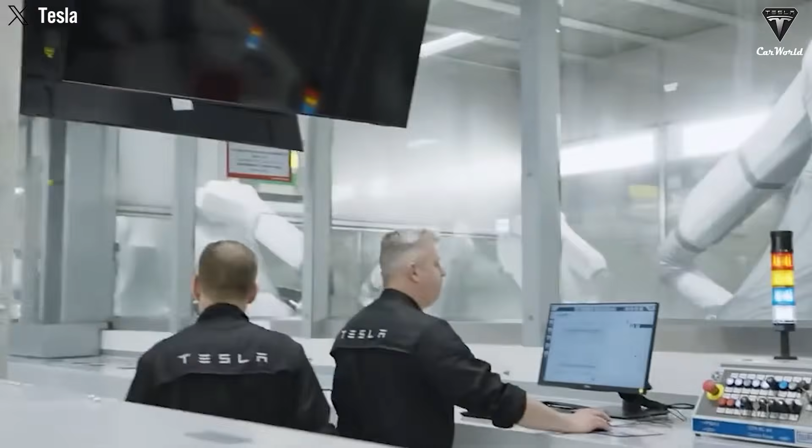So why are some of the most forward-thinking EV companies betting on structural batteries? The answer is a combination of performance, efficiency, and design flexibility. Today, EVs carry their battery packs in heavy, rigid containers placed low in the chassis. That adds weight and eats up valuable space.

But with structural batteries, you get to eliminate the traditional chassis and the traditional battery enclosure, because they become the same thing. You might replace a 450 kilogram metal frame and a 500 kilogram battery pack with a single structural component that does both jobs and weighs significantly less overall.

The benefits go far beyond saving weight. Reducing mass makes EVs more efficient. Every kilogram saved means less energy needed to drive the same distance. Some computer models show that a well-designed structural battery could allow a mid-size EV to travel up to 70% farther on a single charge simply by cutting dead weight.

Not only does this reduce the cost per mile, but it also opens up design possibilities that were previously off-limits due to bulky batteries and heavy structural components. This is why automakers are so intrigued. If they can fuse two of the heaviest parts of a vehicle, the battery and the frame, into one, they don't just save weight. They free up internal space, improve driving dynamics, and potentially lower costs in the long term.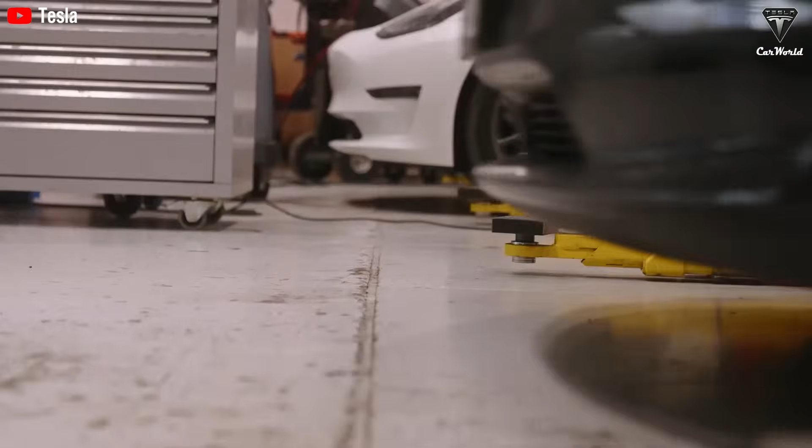Some of the most promising progress has come from researchers working with carbon fiber composites. These materials are already known for being lightweight and incredibly strong, used in everything from sports cars to aircraft. But now, engineers are figuring out how to make carbon fiber composites store electricity.

By embedding them with conductive materials and solid-state electrolytes, researchers have developed a carbon fiber-based structural battery with a significant boost in energy density and strength, thanks to clever resin chemistry and vacuum molding techniques. Their approach packs more carbon fiber into a tighter space while avoiding the air bubbles that weaken both structure and battery performance.

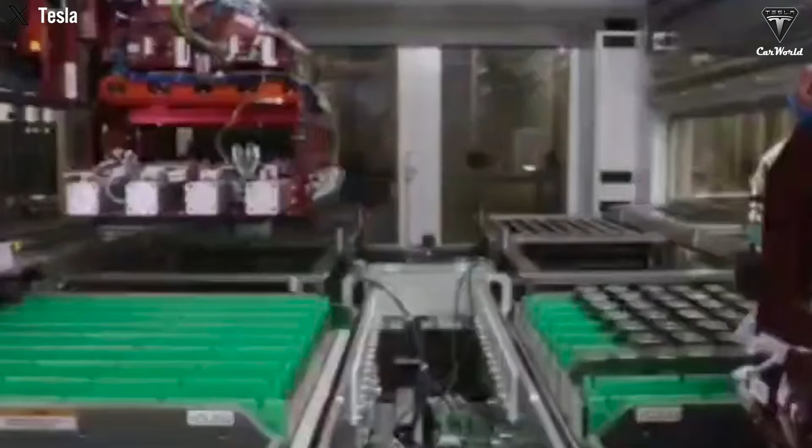In Sweden, researchers at Chalmers University have created a structural battery that uses carbon fiber not just for strength, but as both the electrodes and current collectors in the battery. Their latest version reached an energy density of 30 watt-hours per kilogram. That's still a fraction of traditional lithium-ion batteries, but it's a major leap from earlier prototypes. According to their estimates, such batteries could eventually cut a laptop's weight in half, allow smartphones as thin as a credit card, or even significantly increase the range of an EV.

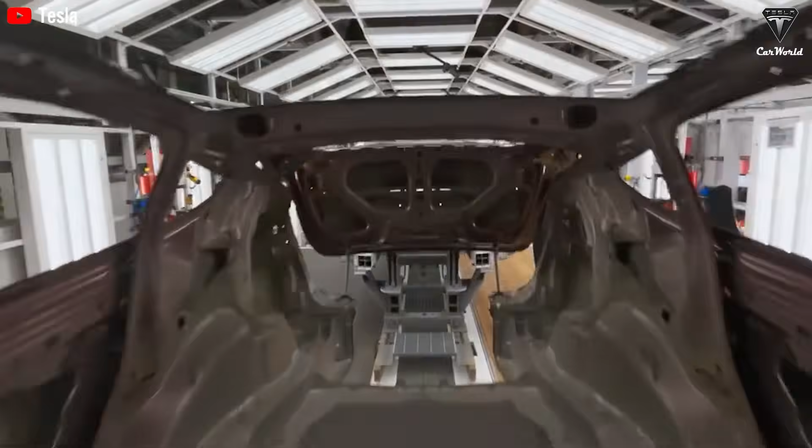Of course, this is not to say that structural batteries are ready to replace traditional batteries across the board. They still have significant hurdles. The biggest challenge is energy density. Structural batteries simply can't store as much energy per kilogram as today's high-end lithium packs. For now, they are less suited for applications where maximum range and compact size are non-negotiable.

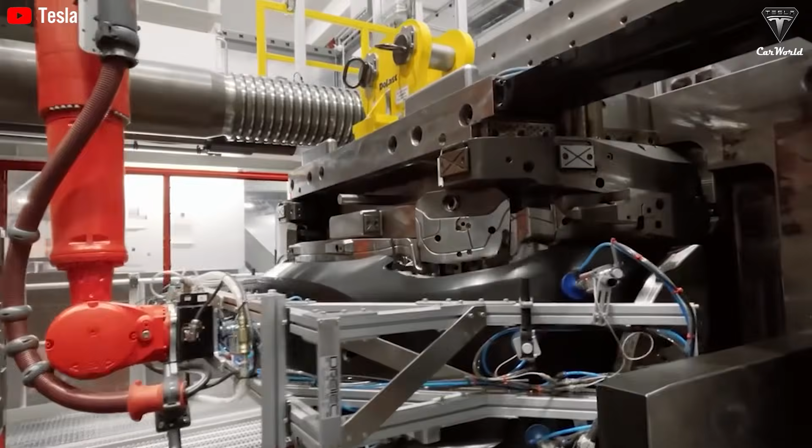But in many other use cases, particularly where space and weight savings are just as important as battery life, structural batteries show immense promise. Aircraft designers, for example, are deeply interested in them. Planes are extremely weight-sensitive, and every pound saved extends range or increases payload capacity. Some research groups are already building lightweight structural supercapacitors into fuselages and wings, demonstrating that these ideas aren't just theoretical.

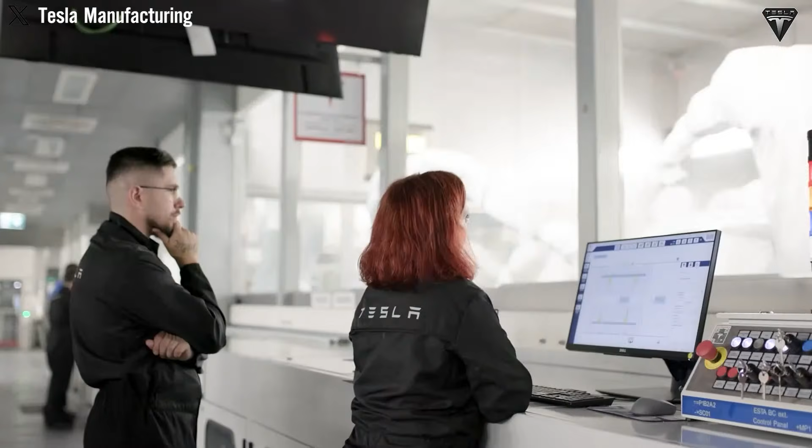Another major factor driving this innovation is sustainability. Structural batteries are expected to use fewer raw materials by replacing multiple components with a single multifunctional one. This could lead to simplified manufacturing, fewer emissions during production, and better recyclability, especially as composite materials and solid electrolytes improve.

Unlike many other next-gen battery technologies still stuck in the lab, structural batteries are already being integrated into real products, at least in limited ways. Tesla's battery-integrated chassis is arguably the first step toward this future, and it shows how structural energy storage can already help reduce complexity in production and improve vehicle performance.

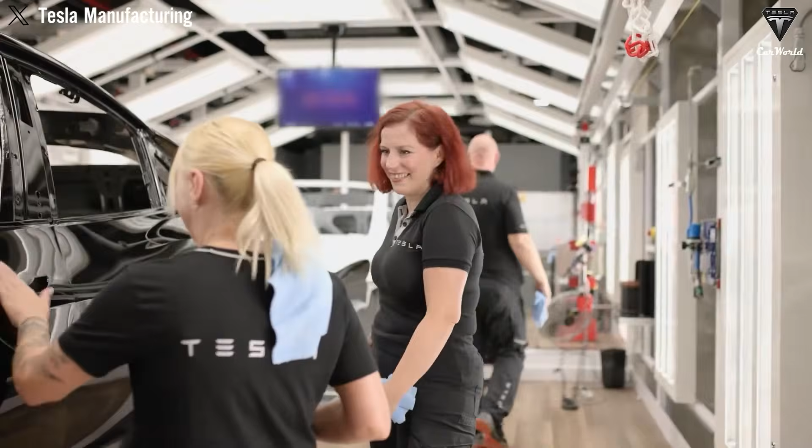Still, this technology is far from mature. For full structural battery adoption, manufacturers will need to solve issues related to safety, such as swelling and deformation during charging, and long-term durability. In traditional batteries, these issues are isolated. But if your car's frame is also your power source, any physical damage becomes a much bigger problem.

There's also the economic factor. Right now, structural batteries are expensive and difficult to mass produce. Composite materials, vacuum forming, and precise layering don't come cheap. Like with many new technologies, structural batteries won't reach cost competitiveness until they can scale up, and scaling up requires big investment, strong partnerships, and a fair amount of risk-taking.

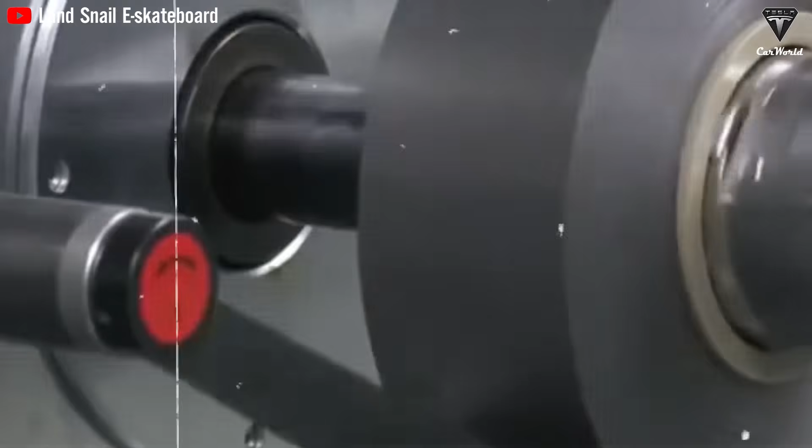Yet, despite these obstacles, the industry's interest is growing, and the more real-world applications we see, the faster the pace of innovation. With structural batteries, companies aren't just asking, how can we make a better battery? They're asking, why does a battery need to be a separate thing at all? That's the kind of thinking that drives real disruption.

So why are EV companies betting against traditional lithium battery design? Because structural batteries offer an opportunity to break free from the compromises we've lived with for decades. Instead of being limited by where the battery fits, how heavy it is, or how hot it runs, structural batteries offer a way to build the battery into the bones of the vehicle itself. That's a powerful idea. Lithium-ion batteries aren't going anywhere soon. They're still the best option for most consumer electronics and long-range EVs.

But the shift to structural batteries suggests that a new layer of innovation is unfolding. One that changes not just how batteries work, but what they are. The next generation of EVs might not carry their batteries. They might be built from them.

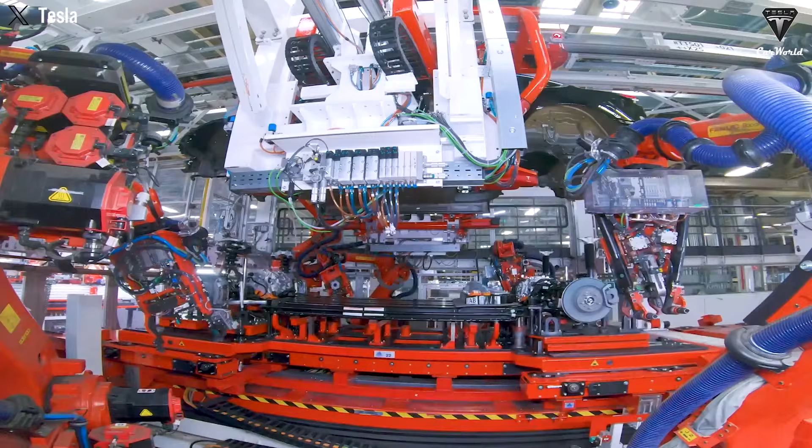How are structural batteries being tested on EVs? Those longevity claims may sound fantastical, yet they track with numbers already measured in accelerated aging chambers. A recent peer-reviewed trial at the Materials Performance Institute cycled a 400mm structural panel more than 3,500 times at 95% depth of discharge while subjecting it to alternating tensile loads that mimic pothole strikes. At the end of the test, capacity had fallen by only 15%, a figure usually reached by standard nickel-manganese-cobalt packs after just 1,000 deep cycles and almost no mechanical abuse.

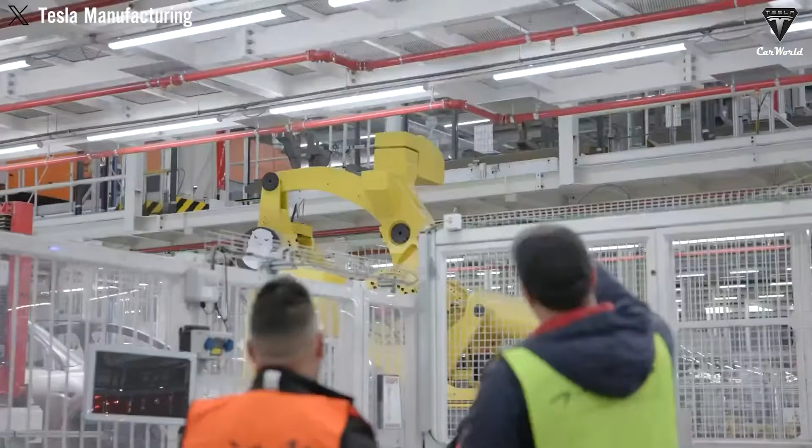That performance stems from two intertwined breakthrough techniques: a semi-solid polymer electrolyte that heals micro-cracks as they form, and a nano-textured carbon fiber weave that spreads strain so evenly the active layers behave more like a rubber sheet than a brittle ceramic. The payoffs extend far beyond raw durability.

In a mid-size crossover, think of something between a Tesla Model Y and a Toyota RAV4, the conventional chassis panels weigh about 420 kilograms, while a separate 82 kilowatt-hour battery pack adds another 510 kilograms. Structural powertrain engineers aim to replace both assemblies with an integrated 100 kilowatt-hour tub weighing 650 kilograms. Although that looks heavier at first glance, the deletion of stamped steel, cast aluminum, and multi-part crash rails leaves the overall vehicle 180 kilograms lighter.

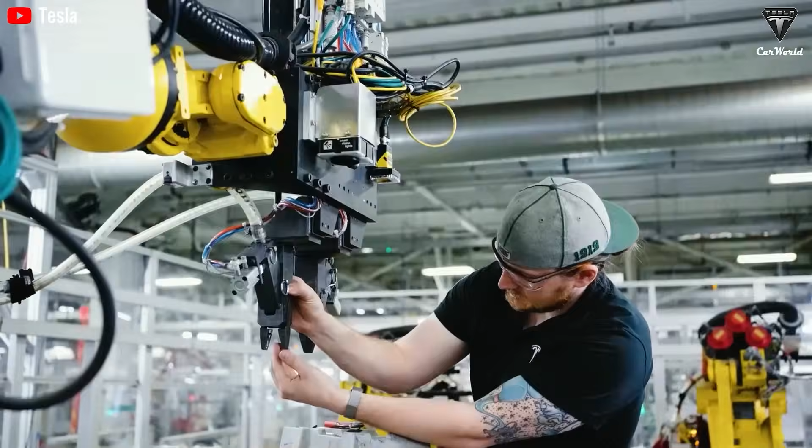To push those range gains even higher, researchers are changing the chemistry that lives inside the carbon shell. Instead of the traditional cobalt-heavy blends popularized over the last decade, several groups are experimenting with high-nickel, low-cobalt spinel cathodes stabilized by aluminum doping. These materials offer 260 watt-hours per kilogram at the cell level, only 10% shy of the best pouch cells shipping today, yet they tolerate far greater compressive stress because the three-dimensional spinel lattice resists the volume swings that typically fracture cathode layers.

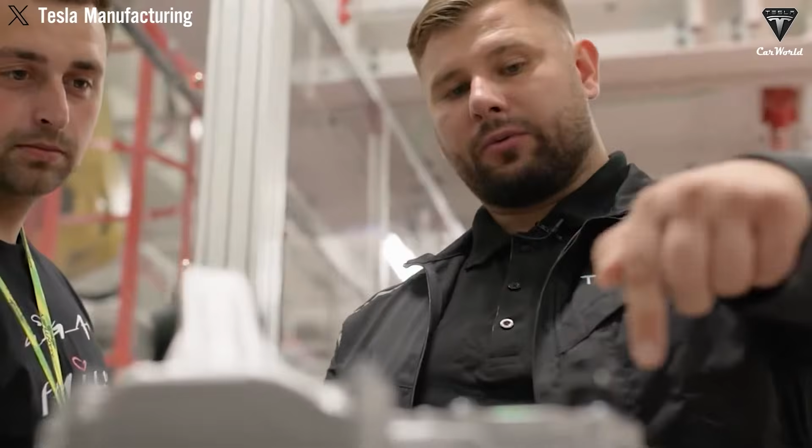On the anode side, the go-to recipe mixes silicon nanotubes with a thin surface grafting of lithium phosphorus oxynitride, a coating that locks silicon in place during expansion so it cannot pulverize or form conductive dead ends. When that anode is impregnated directly into the carbon fiber filaments, electron pathways shorten by more than half, cutting internal resistance to a level where 5 to 80% charging in 12 minutes becomes plausible at 350 kilowatt roadside stations.

Cold weather resilience, the Achilles heel of nearly every electric powertrain sold today, benefits just as dramatically. Standard graphite electrodes slow to a crawl below freezing because the electrolyte thickens and the intercalation process grows sluggish. The polymer electrolyte in structural batteries, by contrast, transitions into a slightly rubbery state at minus 15 degrees Celsius, yet retains ion mobility on par with liquid carbonate solutions at room temperature.

During a recent winter trial in Duluth, Minnesota, a prototype structural battery sedan lost only 9% of its nominal range when ambient temperatures hovered between minus 10 degrees Celsius and minus 20 degrees Celsius, compared with a 28% drop recorded by a conventional pack running the same route.

Safety concerns, particularly the fear of catastrophic fires, have guided every design decision. Because the electrolyte is semi-solid, it will not leak, pool, or vaporize even if the enclosure is punctured. Moreover, the carbon fiber frame acts as a Faraday cage, dispersing heat and electrical arcs so quickly that local hotspots seldom exceed 120 degrees Celsius, well below the runaway threshold. Engineers blast-tested sections with aluminum shrapnel at 200 meters per second. The worst damage was a shallow crater that never breached the innermost current collector layer.